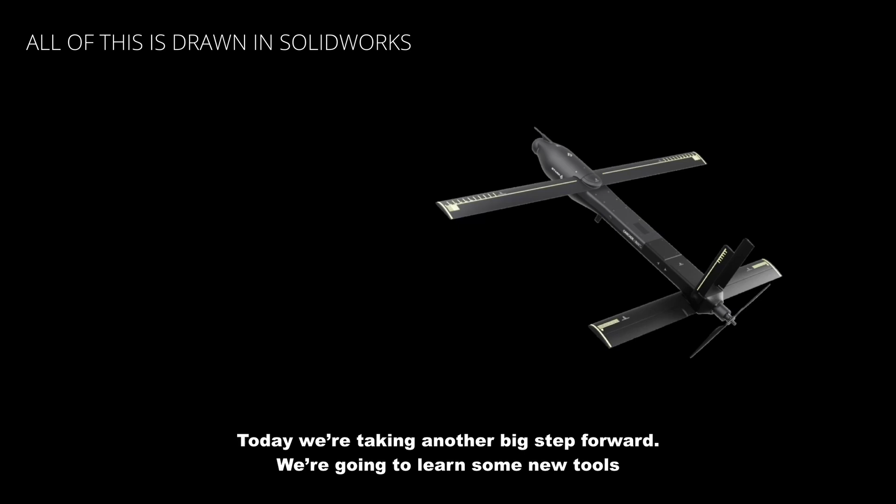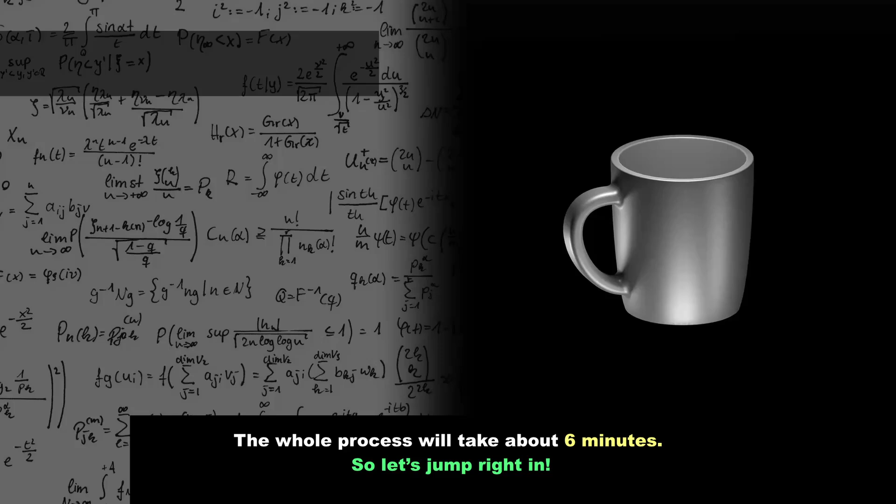On the screen you can see the part we made in the previous video, and here is what we're going to build today. In this lesson, we'll take a close look at the fillet and learn some important modeling techniques. The whole process will take about 6 minutes, so let's jump right in.

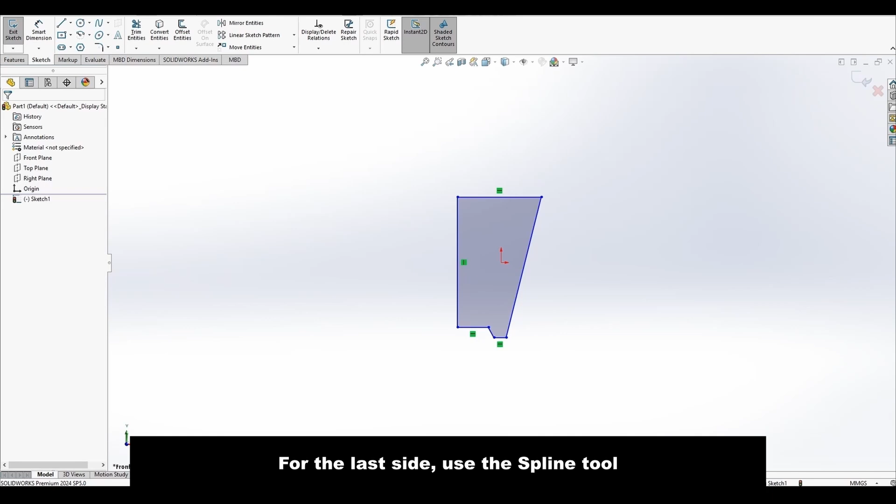Open SolidWorks, create a new part and start a new sketch. Using the line tool, draw the main shape as shown on the screen. For the last side, use the spline tool. Next, use Smart Dimension to set all the necessary dimensions.

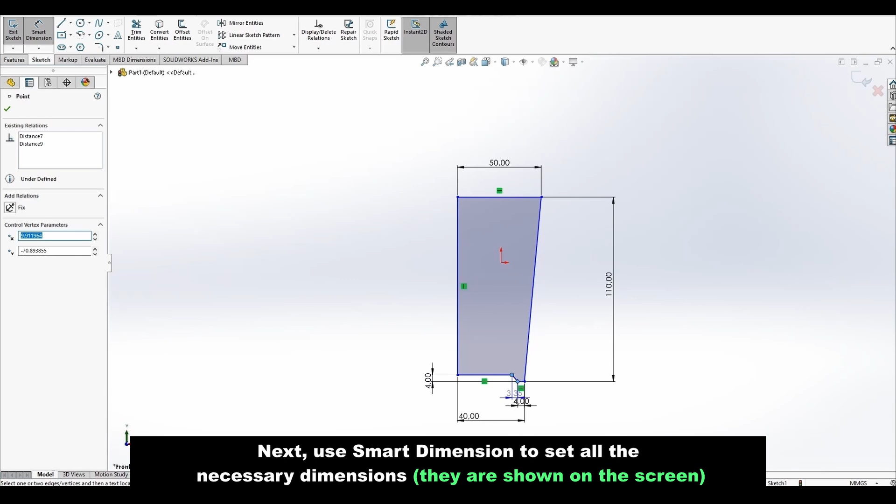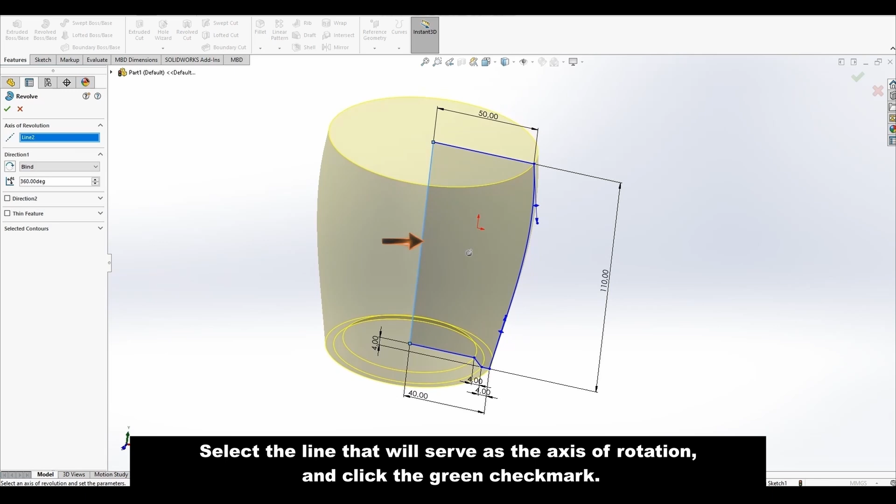And now let's fine-tune our spline. Select it and use the control points to adjust the shape until it looks right. When the sketch is ready, go to the Features tab and click Revolve. Select the line that will serve as the axis of rotation and click the green check mark. And here's what we have got.

Now let's create the handle. Switch to the front plane and start a new sketch. Use the spline tool to draw the center path of the handle. Drag the control points to bend it into a nice curved shape.

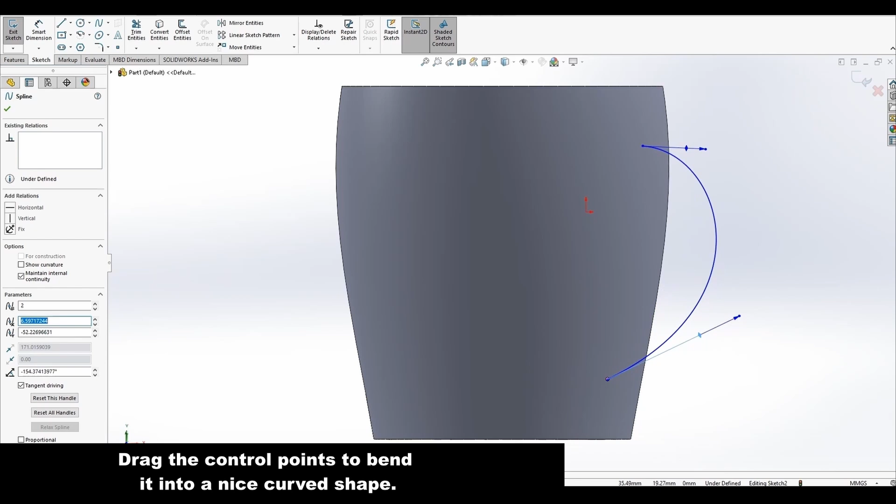Next, add dimensions. Select the end of the spline and the top edge of the mug. Then, add an offset dimension to the right. Do the same for the vertical offset. Select the spline endpoint and the top point of the mug. Then offset it upward.

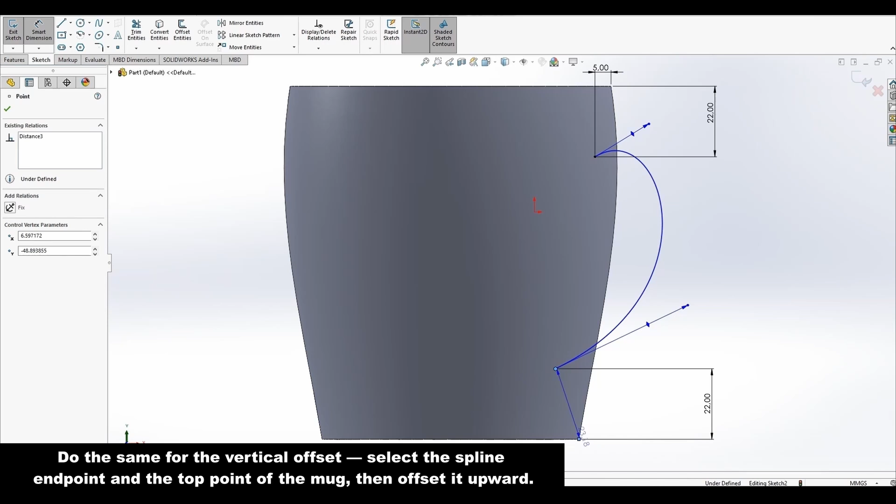Now we need to create a plane for the handle profile. Go to the Features tab, Reference Geometry, Plane. Select the start point of the spline and the spline itself. Then click OK to create plane 1. Switch to this new plane.

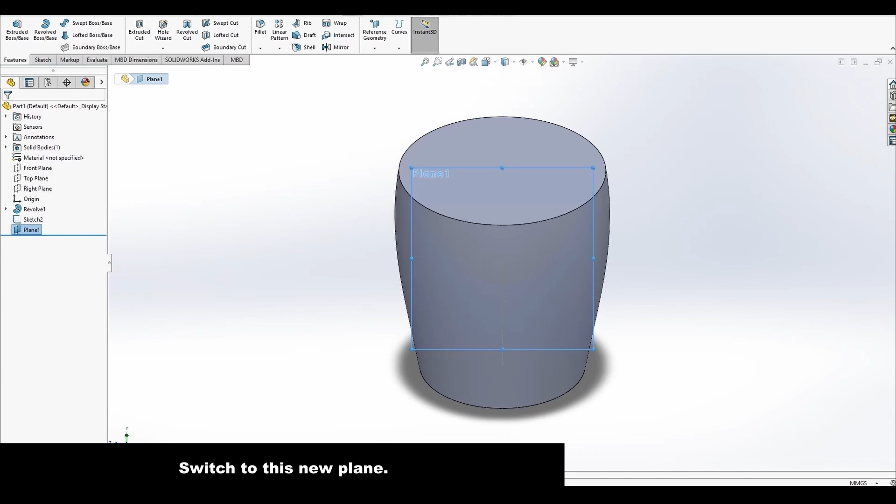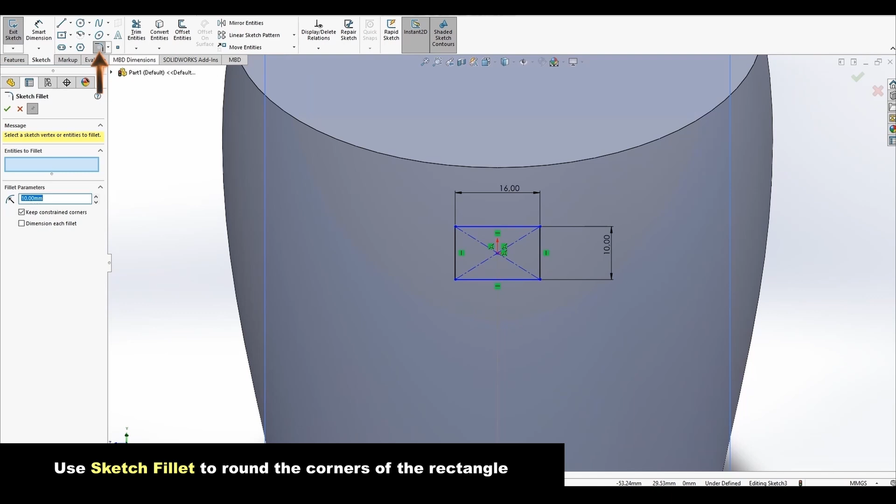On plane 1, draw a small rectangle at the start of the spline. Set the dimension as shown on the screen. Use Sketch Fillet to round the corner of the rectangle. Since the radius of 10 is too big, change it to 3 mm.

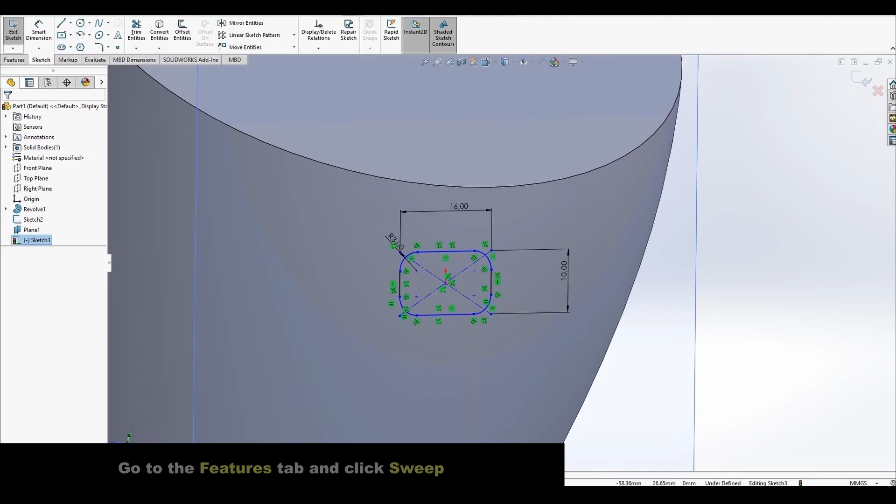And now we can create the handle using the sweep feature. Go to the Features tab and click Sweep. First, select the rectangle as your profile. Then, select the spline as your path. Click the green check mark. Great! The handle is now attached to the mug.

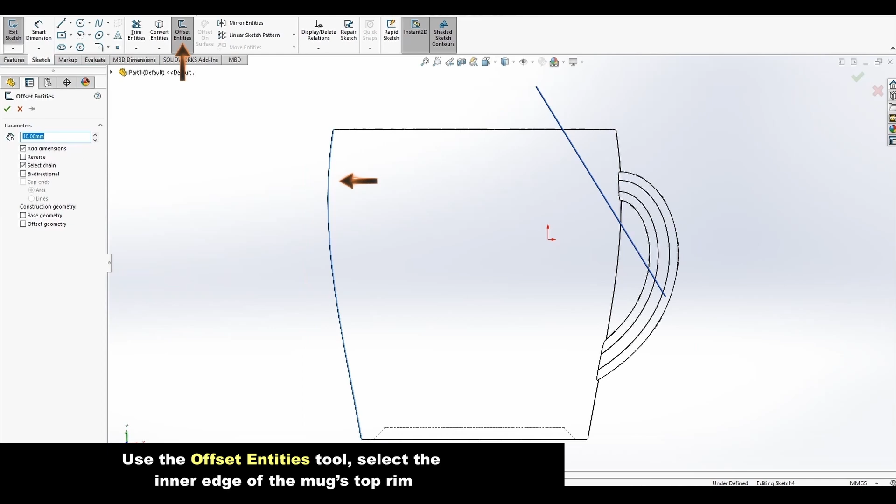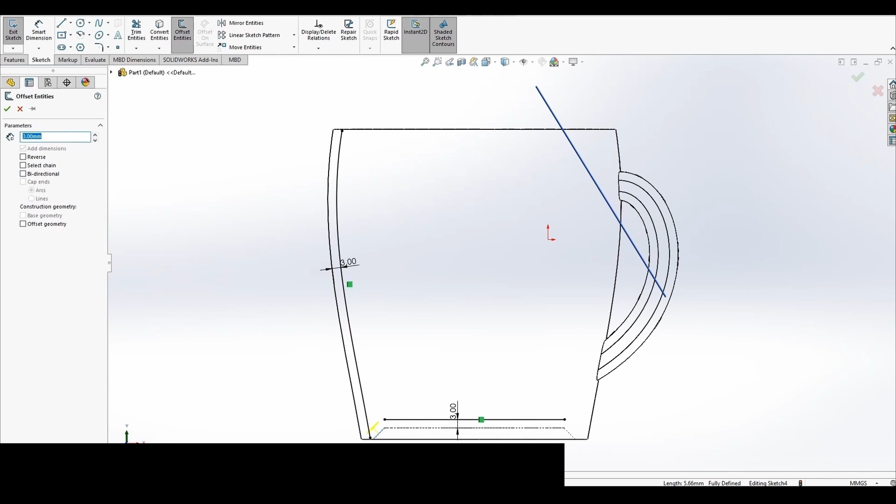Next, let's make the mug hollow inside. Go to the original sketch plane and start editing the sketch. Use the Offset Entities tool. Select the inner edge of the mug top rim, set the offset distance to 3 mm, and turn on the reverse option. Use the line tool to close the sketch where needed.

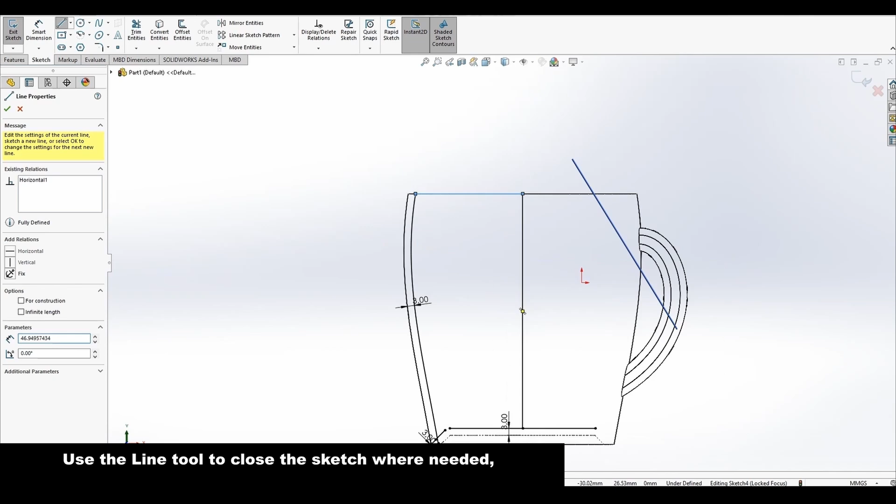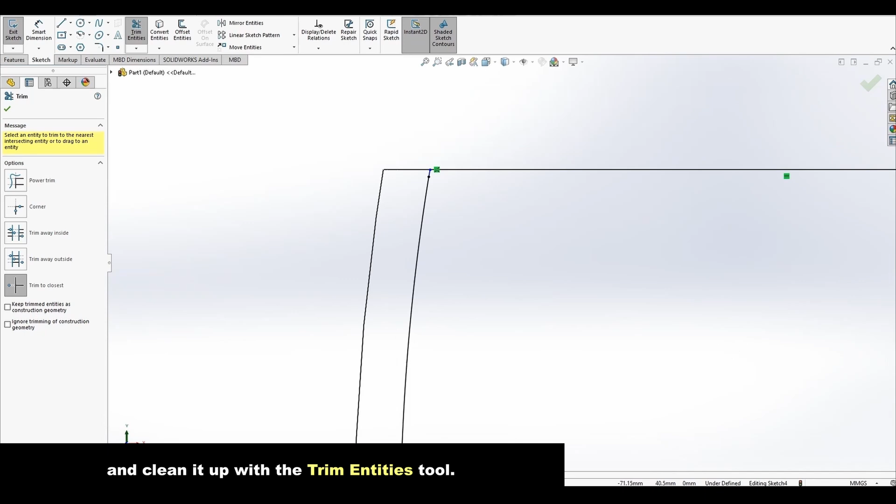And clean it up with the Trim Entities tool. Once the sketch is ready, go to the Features tab and select Revolve Cut. Use the same vertical axis we used earlier for the revolve and click the green check mark. And here it is, our mug is now complete.